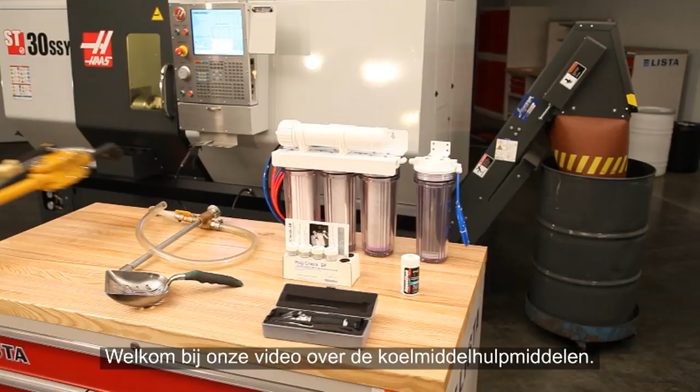Welcome to our Tools of Coolant video. We'll take a look at the tools most commonly used by shops to check and maintain their coolant.

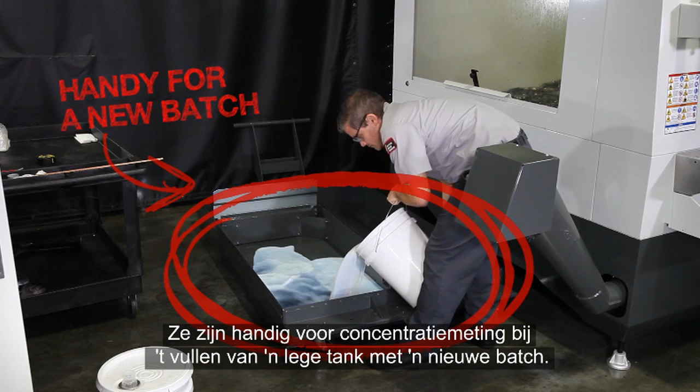We'll start off with the refractometer. This is the most important tool you'll use for keeping your coolant working correctly. Its purpose is to measure the concentration of your coolant. They are handy when filling an empty tank with a new batch to verify the concentration. But a refractometer is an absolute necessity when topping up a tank with coolant already in it.

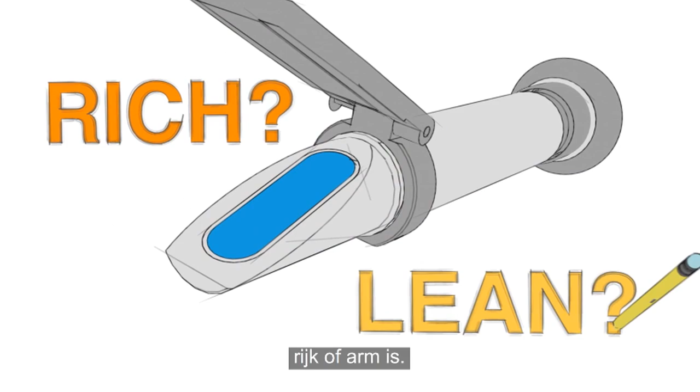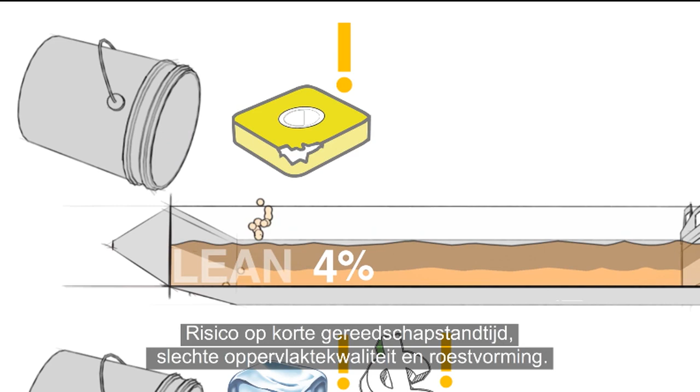Without a refractometer, there's no way to know whether your coolant is running rich or lean. If it's rich and you add more concentrate, you will simultaneously reduce cooling capacity and throw money away. If it's lean and you don't add enough concentrate, then you risk short tool life, bad surface finishes, and rusting your machine and parts. Guessing how much concentrate you should add will lead to problems.

Don't eyeball it. And measuring your coolant's concentration is easy with a refractometer. We're using a manual model here, but digital versions are also available. Think about this. For less money than this 5-gallon pail of concentrate, you can purchase this tool and never have to guess about your concentration again.

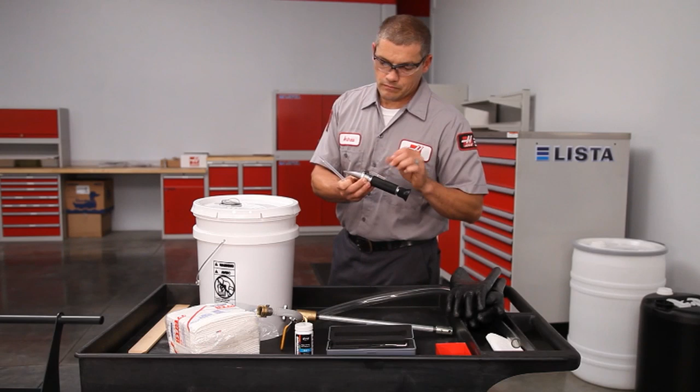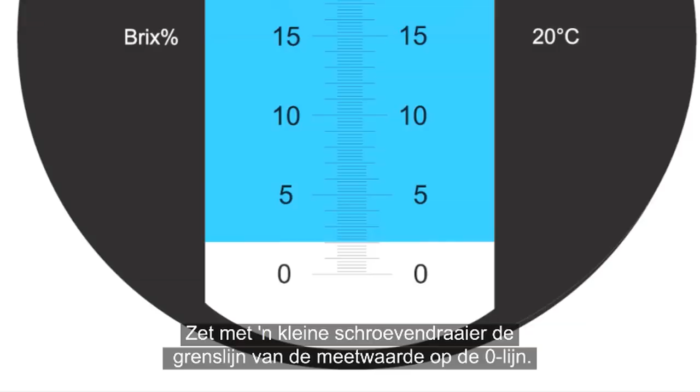So, how do you use one? The first step is always to zero the refractometer, or, in other words, set a baseline for the water you'll be using to make your coolant. Place several drops of the water you're using on the viewing prism and close the plate. Adjust the screw beside the prism until the concentration reading is lined up with the zero line. Wipe off the prism. The baseline for this water has been set.

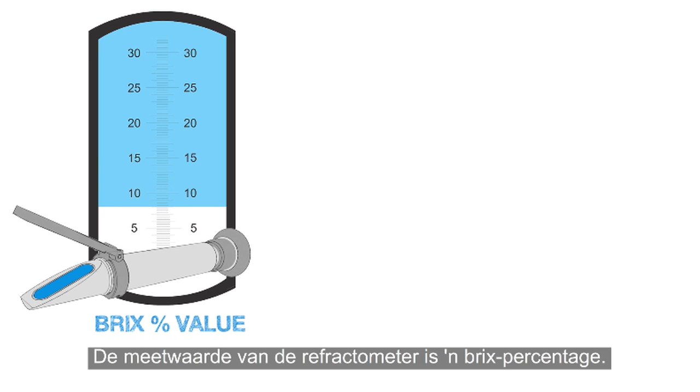Now, let's check the concentration of the coolant. Take a sample and place several drops on the prism. Let's see exactly where our concentration lies. In this case, it's 8%, right in the middle of the 6 to 10% range, which is acceptable for most coolants. The reading the refractometer displays is a Brix percentage value. This value isn't always the same as the coolant's actual concentration.

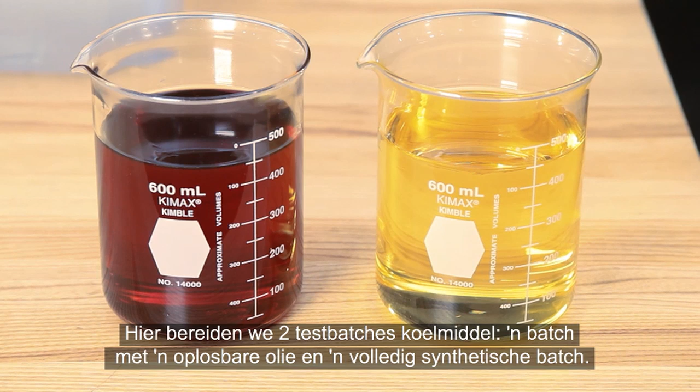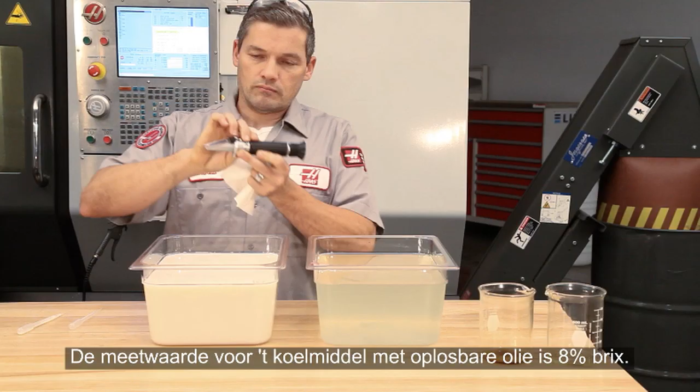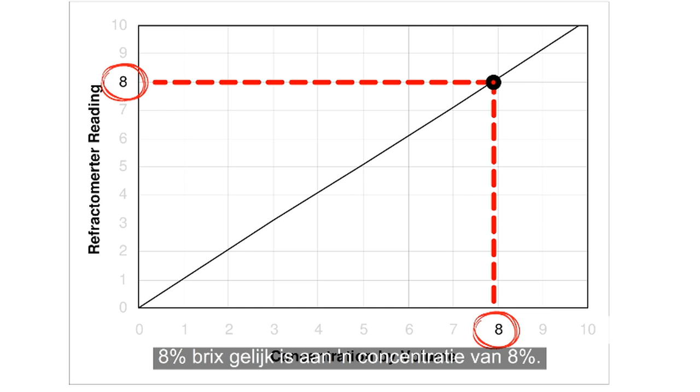Here, we're preparing 2 test batches of coolant, one using a soluble oil and the other a full synthetic. Both vials are holding the same amount of concentrate. And both of these pans are holding the same amount of water. We add the concentrate and mix thoroughly. Now, let's see what our refractometer readings come out to. This soluble oil coolant shows a reading of 8% Brix. When you look at the manufacturer's chart for this coolant, 8% Brix equals 8% actual concentration, or 1:1.

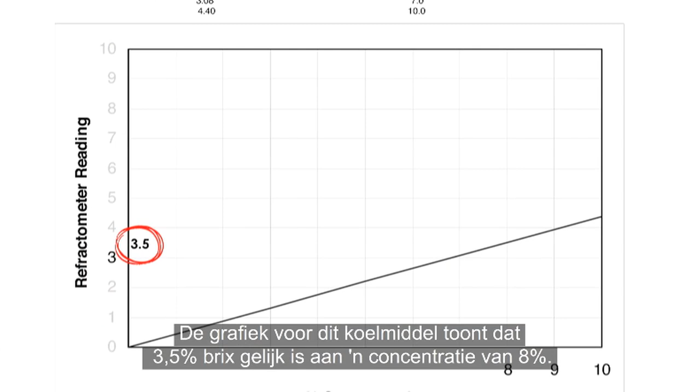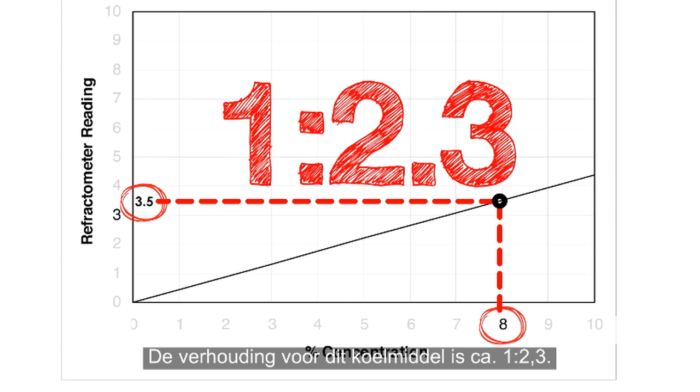The full synthetic coolant, however, shows a reading of 3.5% Brix. Looking at the chart for this coolant, 3.5% Brix equals 8% actual concentration. The ratio of this coolant is about 1 to 2.3. The ratios are different, but the coolant concentrations are the same. Be sure to know the ratio of your coolant. Using a refractometer allows you to adjust your coolant based on sound information, not just guessing.

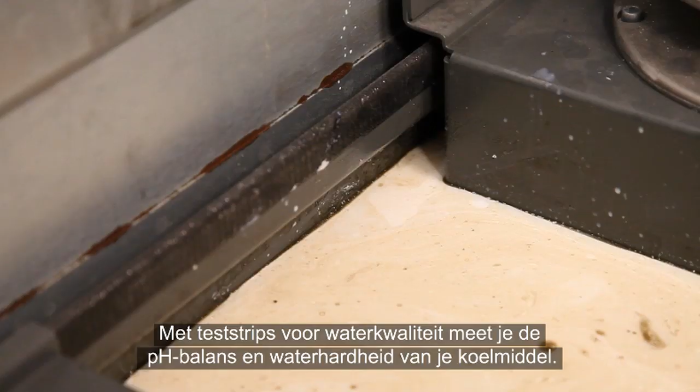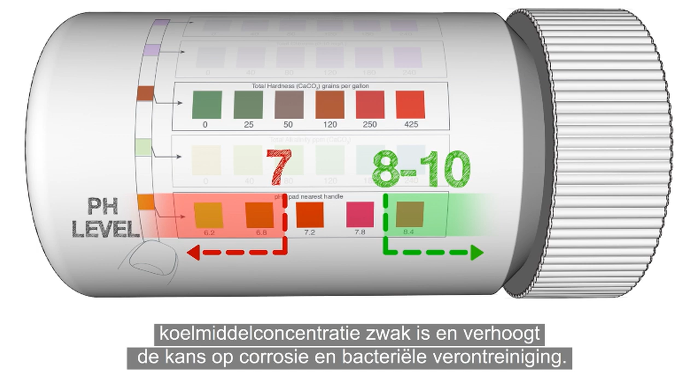What other ways can you check the condition of your coolant? Water quality test strips can be used to check the pH balance and water hardness of your coolant. A pH balance in the range of 8 to 10 is acceptable. pH readings below 7 generally indicate the coolant concentration is weak and increase the chance of corrosion and bacterial contamination.

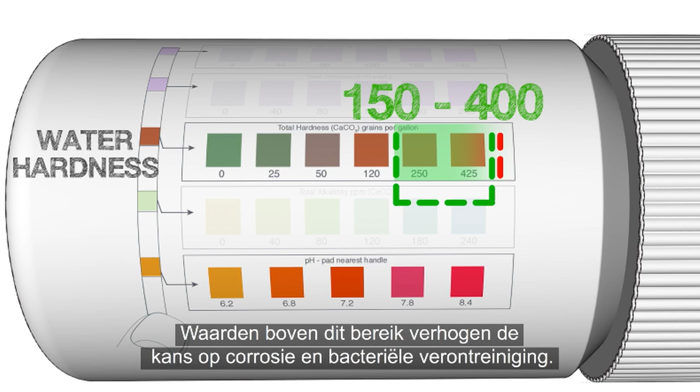A water hardness reading between 150 and 400 parts per million is acceptable for most coolants. Readings above this range also increase the chance of corrosion and bacterial contamination, and separation of the water and concentrate becomes more likely as water hardness becomes excessive.

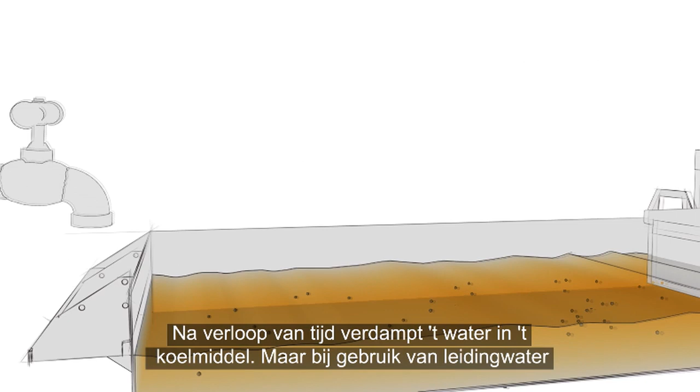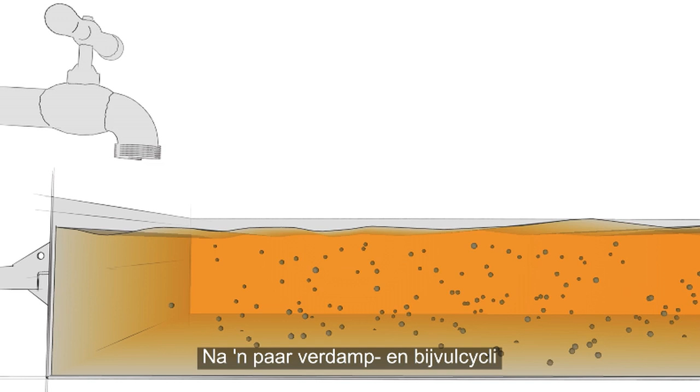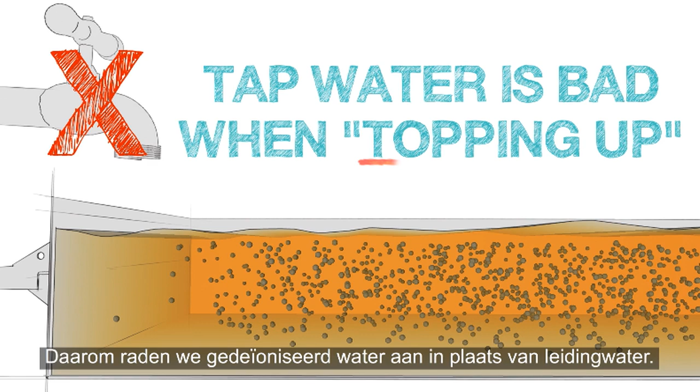So, how does the coolant get to this high hardness level? Over time, the water in the coolant evaporates away. But if tap water is used, the hard minerals in the water do not evaporate. Each time you top up the tank with tap water, a new batch of minerals is added to the mixture. After a few rounds of this evaporate and top up cycle, well, you've got a tank packed with minerals, and your coolant may be ruined. This is why we recommend using deionized water instead of tap water.

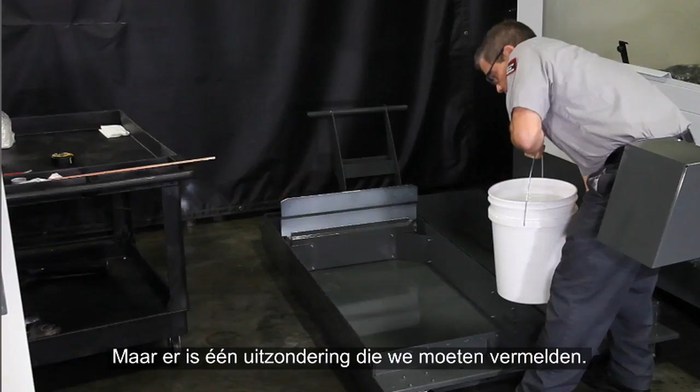Okay, so we've covered why hard water is a problem and how to avoid it. However, there is one exception we really need to mention. It's actually best to use tap water when you're making a new batch of coolant. The minerals in the water provide surfaces for the oils and additives to adhere to initially, yielding the best possible mixture.

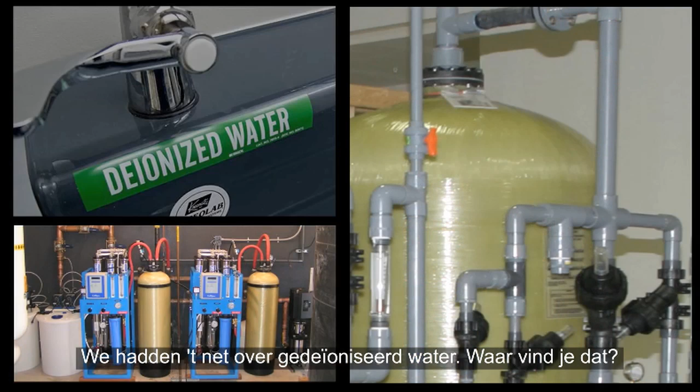Now, a moment ago, we mentioned deionized water. You might be thinking, where do I get this stuff? You can buy DI water from industrial water supply companies, or do what a lot of shops do, and generate it yourself using a water purification system. Large shops with many machines often have complex installations maintained by water purifying companies. For smaller shops, simple, inexpensive units for a few hundred dollars are usually just fine.

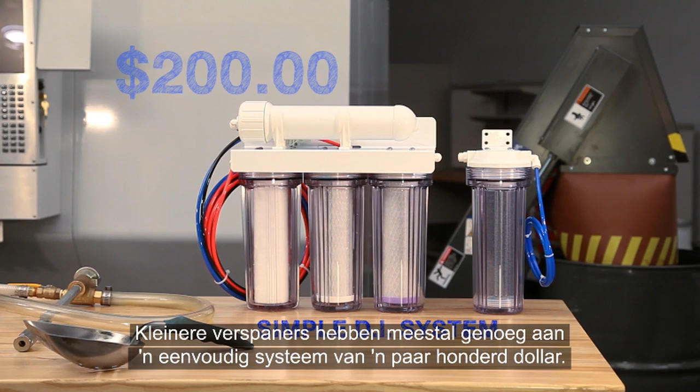These simple systems combine reverse osmosis and deionization and can provide more than 100 gallons of purified water a day for a cost of 5 cents or less per gallon.

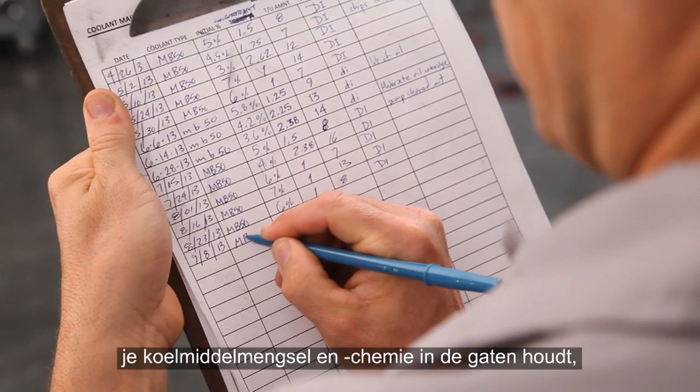If you attend to the maintenance of your coolant tank and keep your coolant's mixture and chemistry in check, you should never have to worry about bacterial infestations. However, in the unfortunate event that you've let your tank maintenance falter, you may find it turning into a stinky, disgusting mess. At this point, you may need to test for bacteria in your tank.

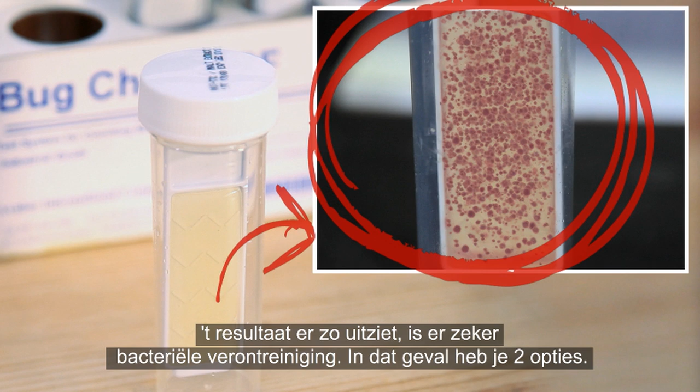Here, we're using a bug check bacteria test kit. Take a sample of the coolant and allow it to sit over the weekend. On Monday morning, if it looks like this, you definitely have a bacterial infection. In this case, you really have two options. You can add a biocide to your tank, or empty it out and start over.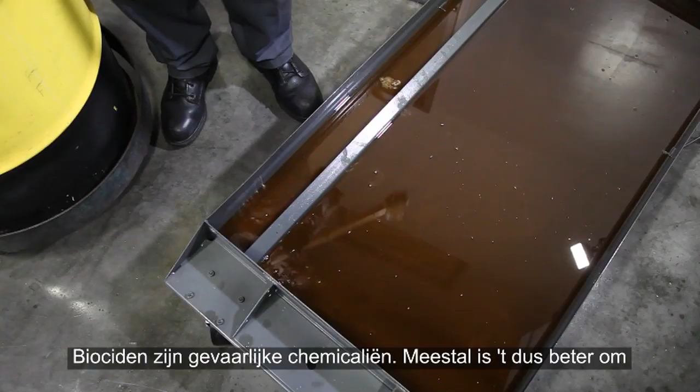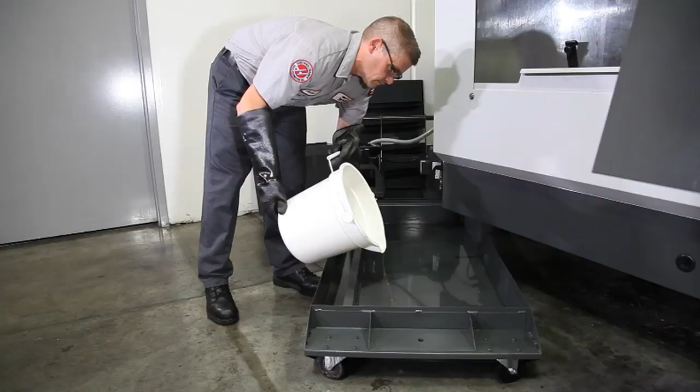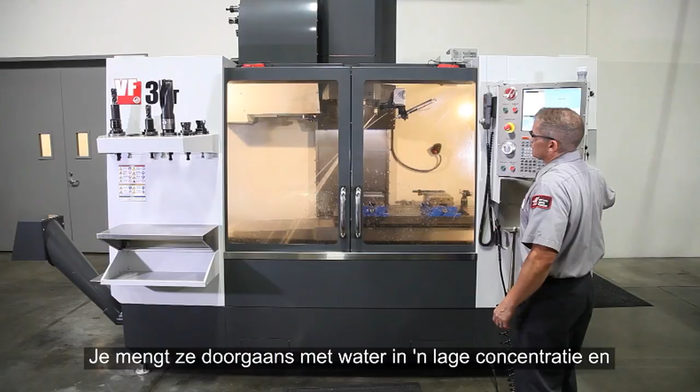Since biocides are hazardous chemicals, usually the better option is to drain the coolant and clean the tank and pumps. Then you should prepare a high alkaline cleaner and pump it through the system to kill the bacteria that remains throughout the coolant plumbing. These high alkaline cleaners are usually available from your coolant supplier. They are typically mixed with water at a low concentration and run through the system for a few hours.

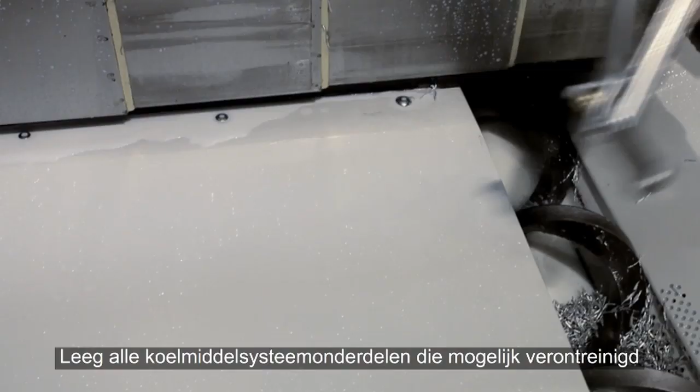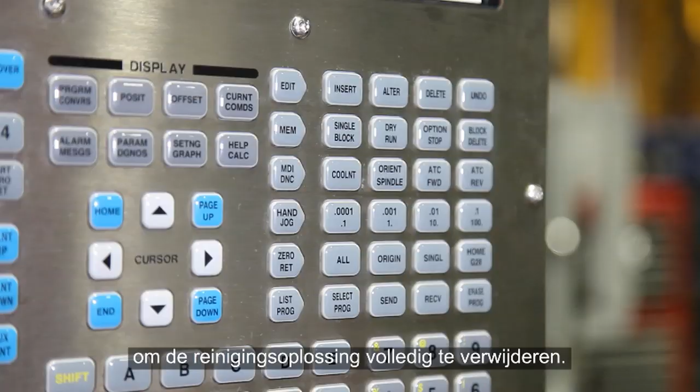Run all the coolant pumps on the machine and be sure to empty all areas of your coolant system where contaminated coolant may accumulate, like the washdown hose, for instance. When you're finished with the cleaner, drain it and follow it up with a rinse using a partial batch of 2% coolant in order to completely remove the cleaning solution. Now you're ready to start a new batch of coolant. If you properly maintain your coolant, all this headache should never be necessary.

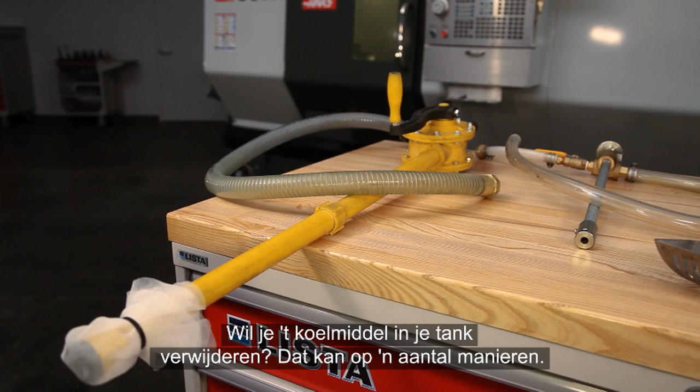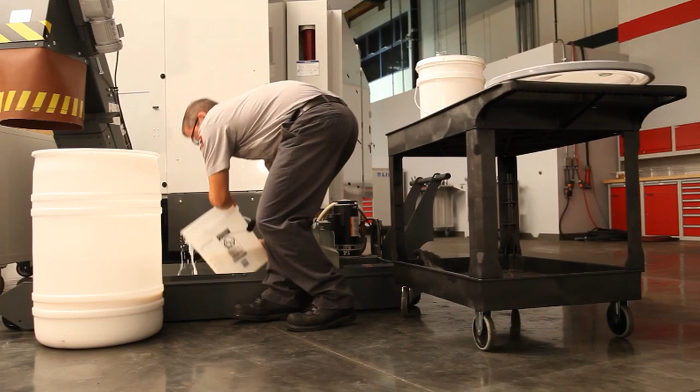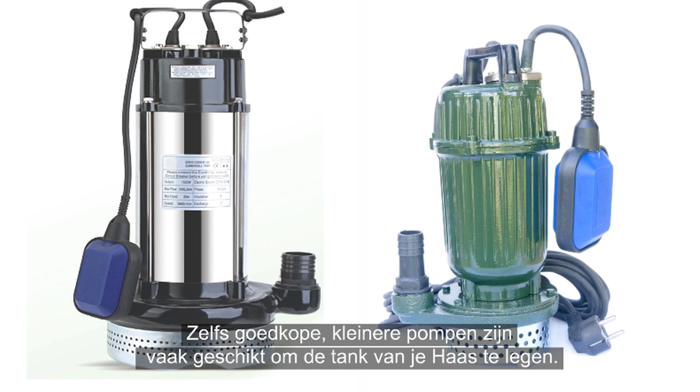When you need to drain the coolant in your tank, there are a number of ways to do this. The most readily available method, of course, is to use a bucket to bail the old solution out. This starts off easy, but it's difficult to get all the coolant out once the level is down below about 30% full. Some wet and dry vacs can be used to pump water out of a coolant tank. Also, a wide variety of sump pumps exist. Even inexpensive smaller units can often be used to drain the tank of your Haas machine.

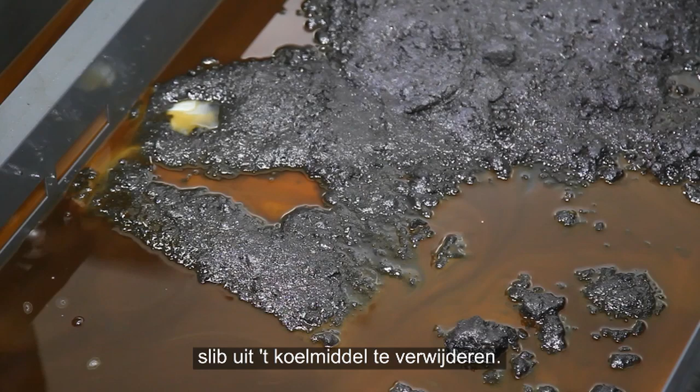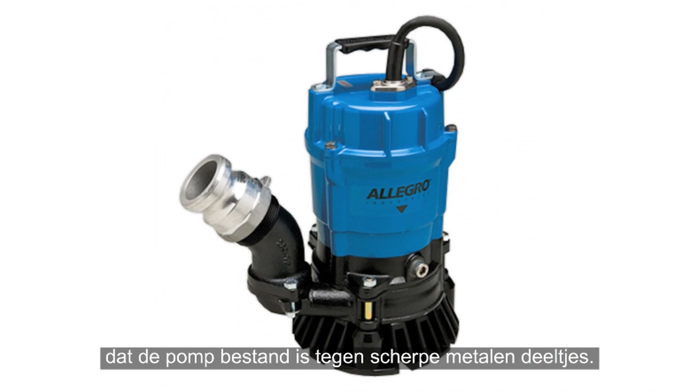But it's usually difficult to remove all the chip particles and sludge from the coolant before it's pumped out. So make sure the pump you're using either has a filter screen at the inlet or that the pump is rated to handle sharp metal fragments. Manual pumps can also be used. They are slower and take some effort, but do a good job of emptying everything in the tank. You'll probably need a screen or filter for these manual pumps too, since they will get clogged by chips.

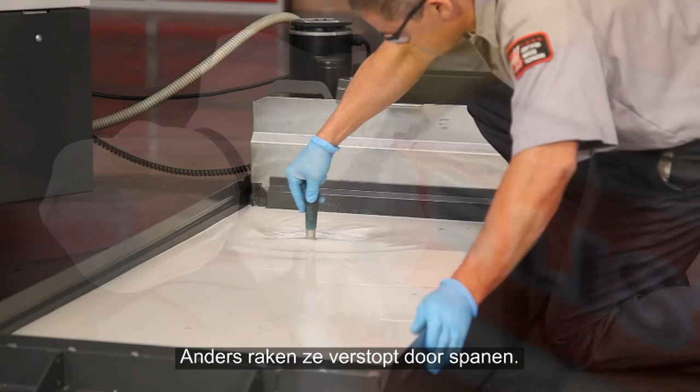When chips accumulate in your coolant tank, a perforated metal scoop can be used to lift them out easily, while letting the coolant drain off. You may recognize the metal scoop we have here. This sturdy cat litter scoop works surprisingly well, and they are easy to find online.

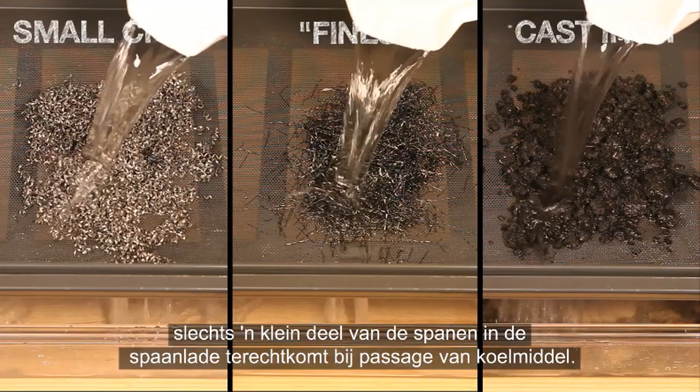Sometimes, really fine chips or sediment-like contamination can reach your tank. Let's take a closer look at how the coolant inlet panel works and when you need to consider using a chip strainer. The perforations on the coolant inlet panel are very small and do an excellent job of retaining even fine chips. In the center image, you can see that even with this pile of fines sitting directly over the inlet area, with coolant passing over them, only a small fraction of the chips make it into the pan.

Despite this, over the span of many weeks, if the chips on your machine are extremely small, or you are machining something like cast iron where the chips form a grit-like substance, then a larger quantity of chips can make it into your coolant tank and gradually build up. In this case, you should consider using a chip strainer like the ones that come with your new Haas machine. Stretched over the supplied chip basket and placed above the inlet panel, it allows coolant to pass through while keeping chips from entering the tank.

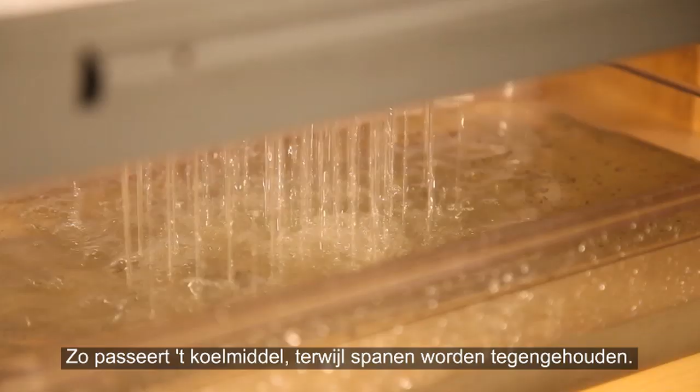If you're going to mix your coolant manually, a graduated 5-gallon bucket can be used to measure the water and concentrate you'll be mixing. These buckets are readily available for purchase online, or you can make your own bucket. A simple tip to make your own is to pour 1 gallon at a time into your bucket. Measure each 1-gallon increment up to 5 gallons, and then mark the bucket at the measured spacing.

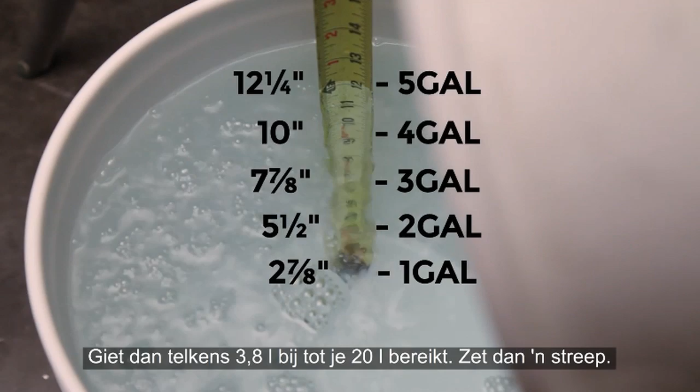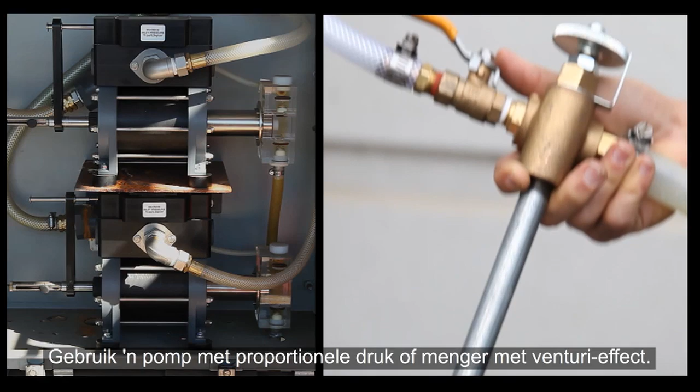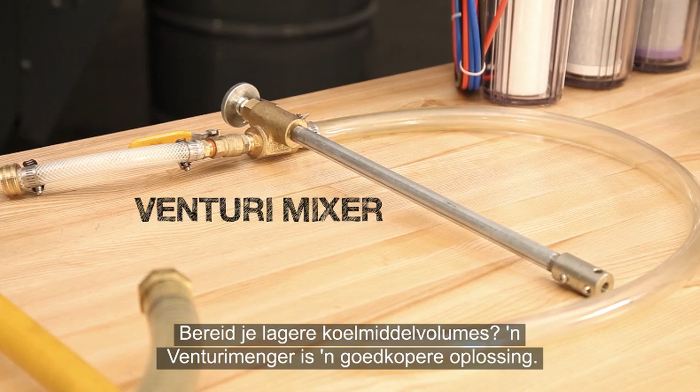If you want to mix your coolant in a quicker and more thorough way, consider using a proportional pump or Venturi mixer. Proportional pumps are usually used when higher volumes of coolant need to be made frequently, and when coolant needs to be pumped over longer distances. When lower coolant volumes need to be made, the Venturi mixer is the less expensive option. The mixer uses water pressure to draw a metered amount of concentrate up into the water stream, where it mixes completely with the water as it's dispensed.

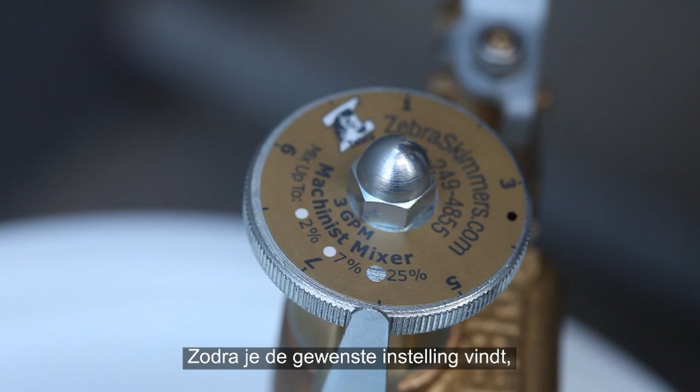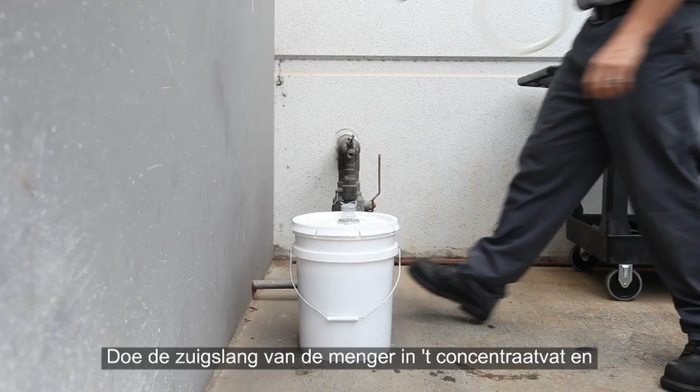The mixer can be adjusted to output a range of concentrations, and once you've found the setting you want, note the position of the dial or mark it in case someone else adjusts it. That way, you can always get back to exactly the right setting with a quick adjustment. Place the mixer's suction tube into the concentrate container and then connect the mixer's water inlet hose to the faucet. When selecting a mixer setting, dispense a small amount of coolant and check it out with your refractometer. Once you have the mixer adjusted to your satisfaction, you're ready to mix coolant.

Well, that wraps up this Tools of Coolant video.